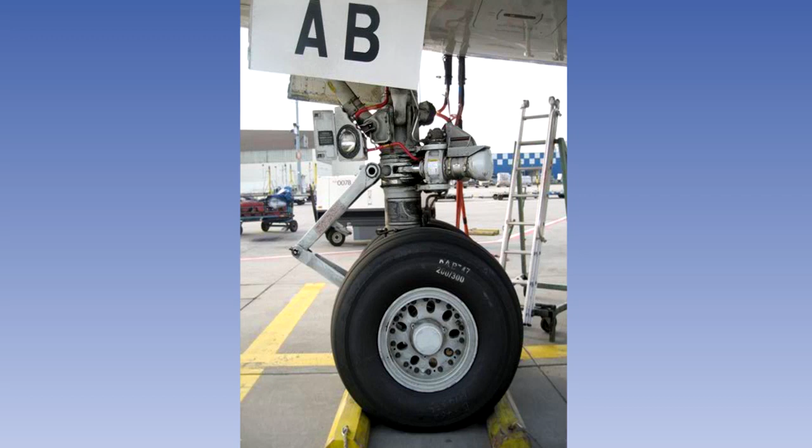In this short lesson on aircraft wheels, you will learn about the components that make up a wheel and the materials from which a wheel is made. An explanation will also be given of the purpose and function of fusible plugs.

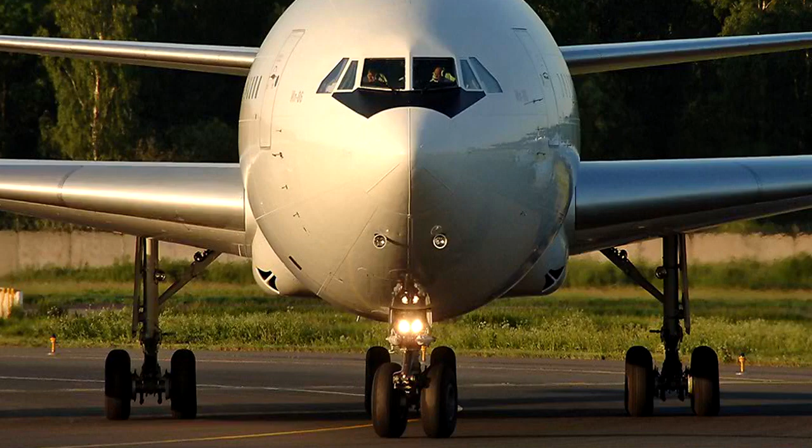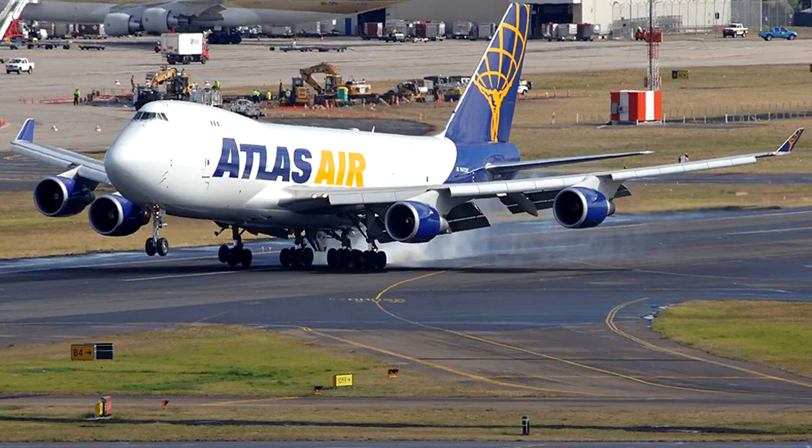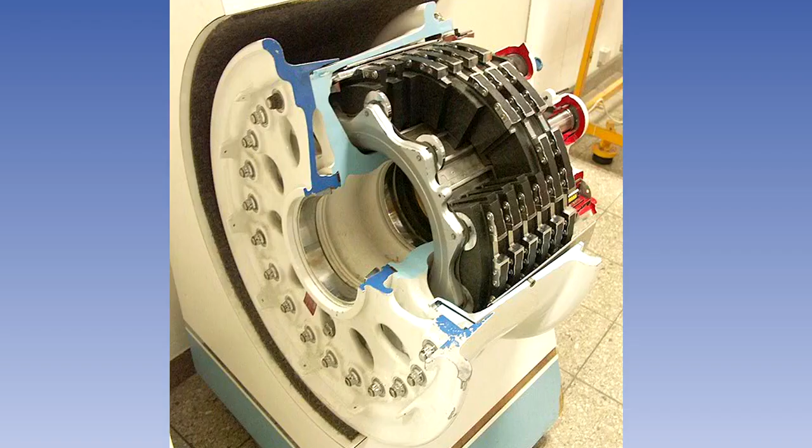The wheels and tyres of an aircraft support it when on the ground and provide it with a means of mobility for takeoff, landing and taxiing. The pneumatic tyres help to cushion the aircraft from shocks due to irregularities in the ground surface and take some of the shock on landing. The main wheels, and in a small number of cases the nose wheels, house brake units which control the movement of the aircraft on the ground and provide a means of deceleration on landing.

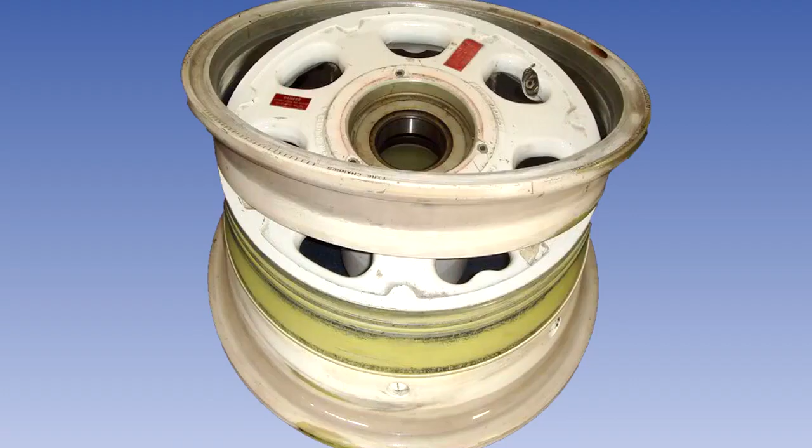Because aircraft tyres are usually larger and stiffer than the tyres found on cars, wheels have to be specially designed to facilitate tyre replacement. There are two types of wheel in common use: the loose or detachable flange type, and the divided wheel.

Both the loose and detachable flange types of wheel are made with one flange integral with the wheel body and the other a separate removable part, which is machined to fit over the wheel rim. The difference between the loose and the detachable flange types is the method by which the removable flange is secured.

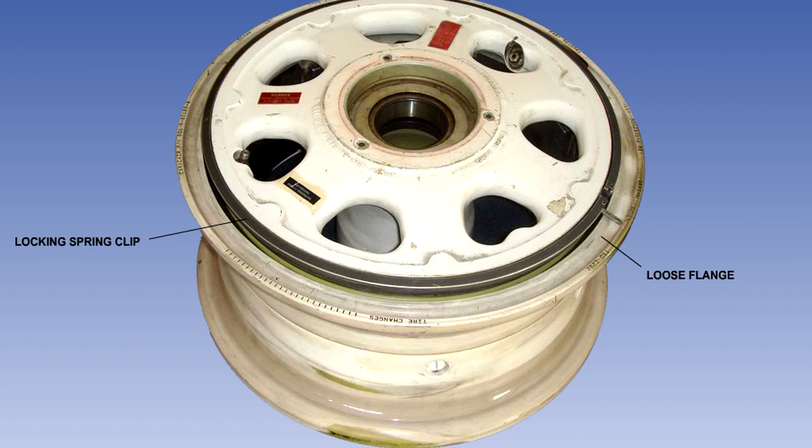In the loose flange type, the flange is retained by a locking device on the wheel rim and held in place by the tyre pressure. The detachable flange type of wheel has the flange secured to the wheel body by nuts and bolts. A detachable flange may be a single piece or 2 or 3 pieces bolted together.

The advantage of the loose and the detachable flange type of wheel is that the tyre can be changed without removing the wheel from the aircraft.

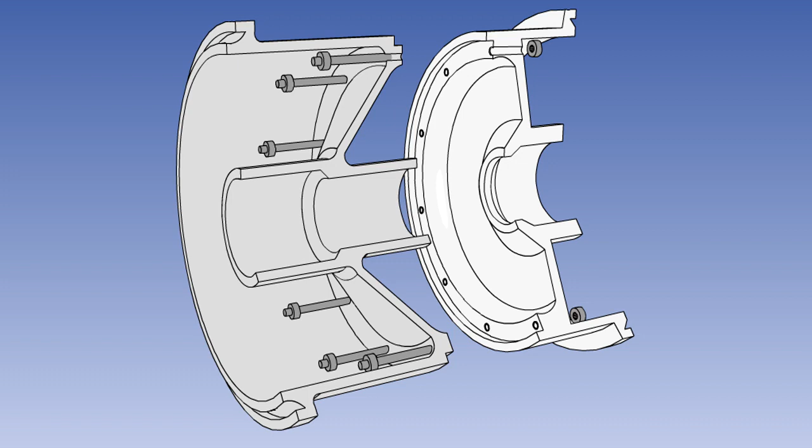The type of wheel most usually found on aircraft is the divided wheel. It consists of 2 half wheels matched up and joined together by bolts which pass through the 2 halves. The bolts are fitted with stiff nuts, or if one half of the wheel is tapped - that is, the bolt hole has an internal thread cut in it - then each bolt is locked with a locking plate.

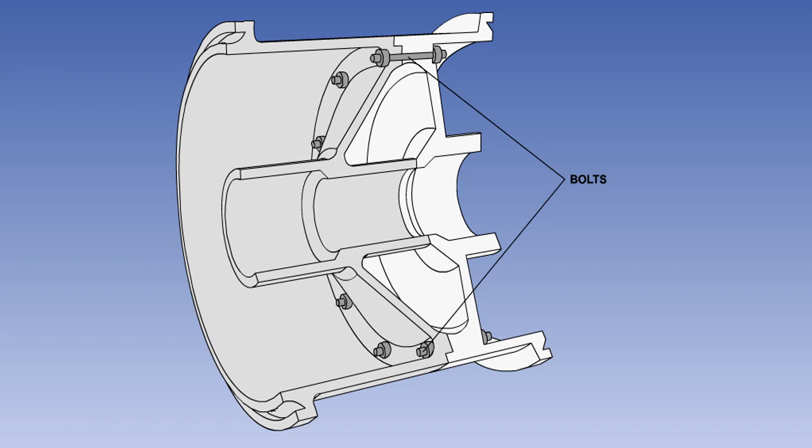In this particular example, the 2 halves are clamped together by bolts fitted with locking nuts and washers. The wheel shown here is designed to be used with a tubeless tyre. It has a seal incorporated at the joint to prevent leakage between the 2 halves and provide an airtight fit.

The inner and outer drive blocks are used to rotate the discs in the multi-disc brake units. These will be discussed in a later lesson.

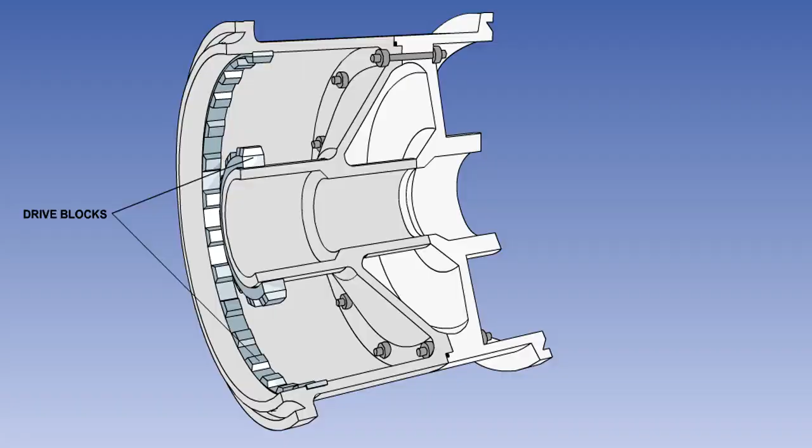When in service, particularly during heavy braking, there is a tendency for the tyre to rotate or creep around the wheel. This creep, if excessive, will tear out the inflation valve on a wheel fitted with an inner tube, causing the tyre to burst.

Creep is less likely to occur if the tyre gas pressure is correctly maintained. The procedures for doing this are explained in the aircraft tyres lesson, but additional features to prevent creep may be incorporated in the design of the wheel, and we'll look at 2 such features now.

Wheels are often produced with a knurled flange. The inner face of the wheel flange is milled, so that the side pressure of the tyre locks the tyre walls to the flange.

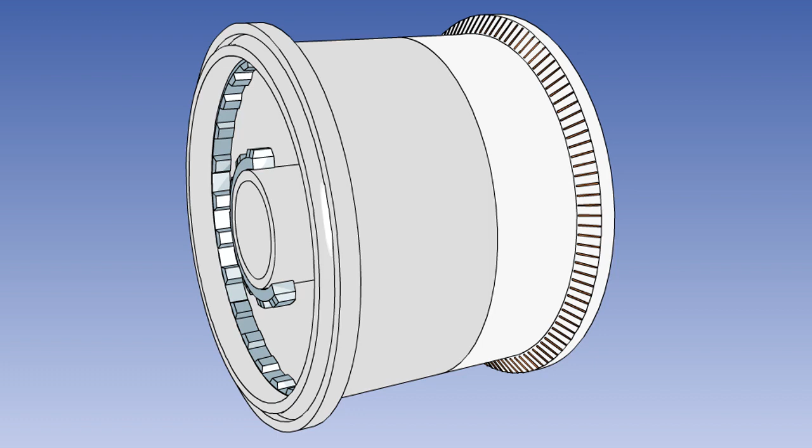The wheel rim is tapered, so that the flange area is of greater diameter than at the centre of the rim. When the tyre is inflated, the side pressure forces the tyre outwards to grip the rim.

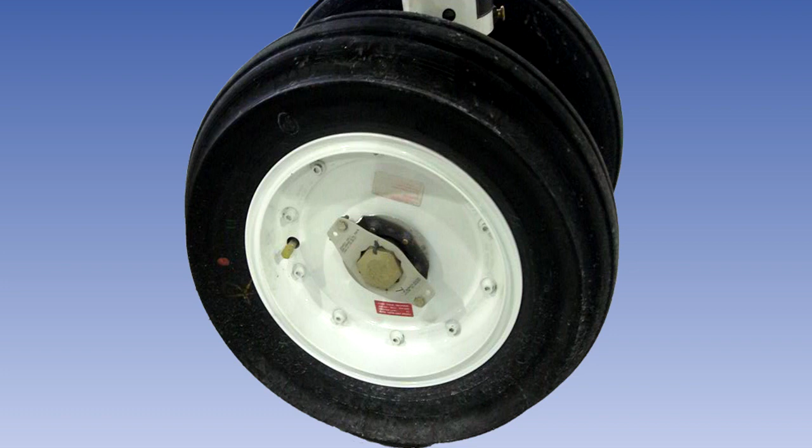Aircraft wheels are either cast or forged, then machined and ground to the required finish. They are made of either aluminium or magnesium alloy. Magnesium alloys are lighter, however they are subject to corrosion if not correctly treated, and magnesium is flammable, so there is a greater risk of fire. For these reasons, aluminium alloys are normally used, unless low weight is essential.

Whichever alloy is used, after initial machining has been carried out, an anti-corrosive treatment is applied, and a final finish using cellulose or epoxy resin paint is applied to each wheel.

Wheels for tubeless tyres are similar in construction to those for tyres fitted with inner tubes, but are ground to a finer finish and impregnated with Bakelite to seal the material.

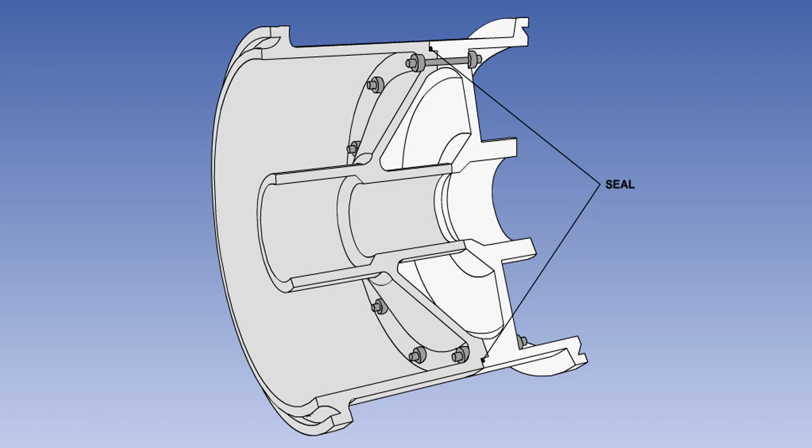Seals are used between the parts of the wheel to prevent leakage. Unlike wheels for tyres fitted with tubes, the valve is fitted into the wheel itself and is thus not affected by creep.

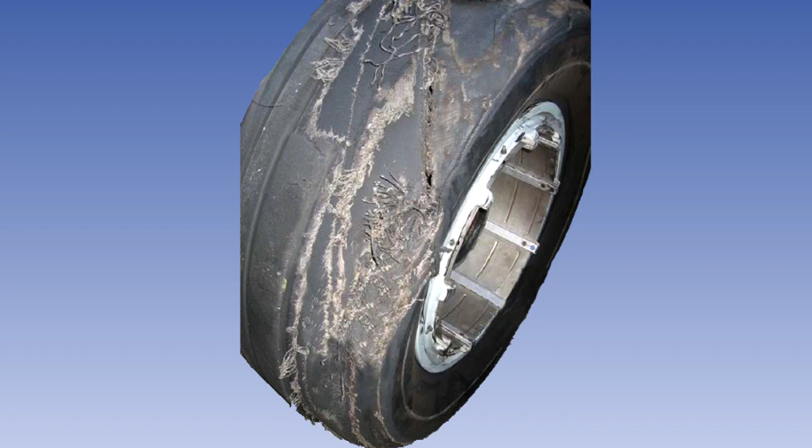Under extra hard braking conditions, the heat generated in the wheel, tyre and brake assembly can be sufficient to cause the pressure to rise to a level that the tyre cannot withstand, causing it to split, with possible catastrophic consequences for the aircraft. This is commonly known as a tyre blowout.

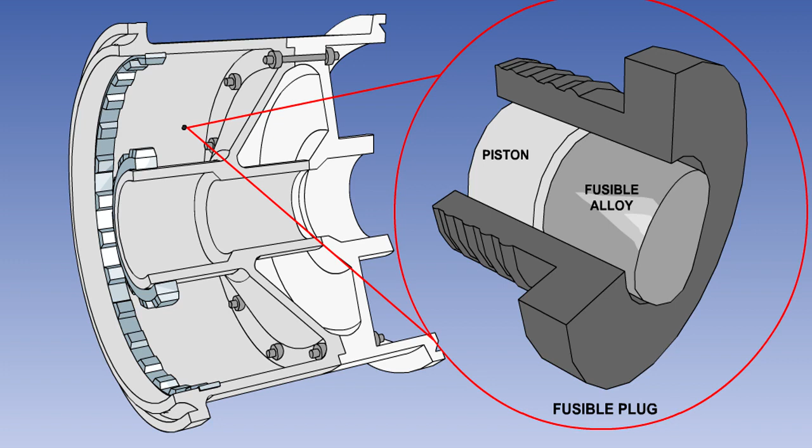To prevent a sudden blowout, fusible plugs or thermal plugs are fitted in some wheels with tubeless tyres. These plugs are screwed into holes in the wheel rim. They are sealed by a piston, which is held in position in the plug by a fusible alloy. Under excessive heat conditions, the alloy melts, allowing the piston to escape. This causes the tyre to deflate in a controlled manner.

The important points to be taken from this lesson are related to the fusible plugs. Remember that they are fitted in the wheel rim, and they protect the tyres from explosion due to overheating by releasing the gas in a controlled manner if an excessive temperature is reached.